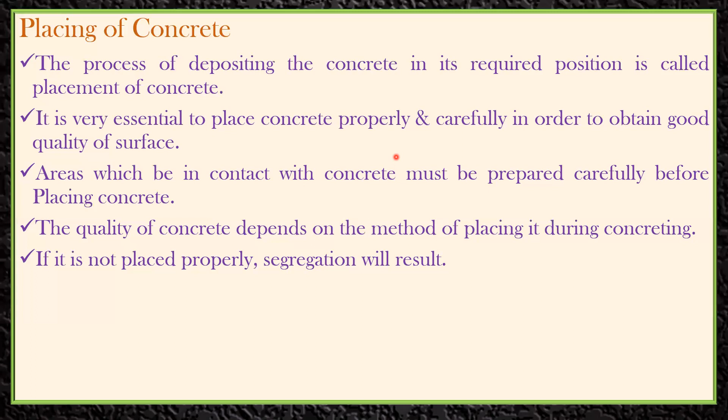So coming to the precautions: what precautions do you need to take while pouring, or placing, the concrete? The concrete should not be thrown from a height of more than 1 to 1.5 meters to prevent segregation, which we already saw. We should not do this. We already understood this, but since this is a part of concrete,

we need to understand it. So again, we know that segregation will happen if the height is more than 1.5 meters, so we should not do that. It's the same thing as I explained: you should not do the concreting from here. Instead, make a small opening here. From here you place the concrete, close that opening, and then again from here you can do the concreting.

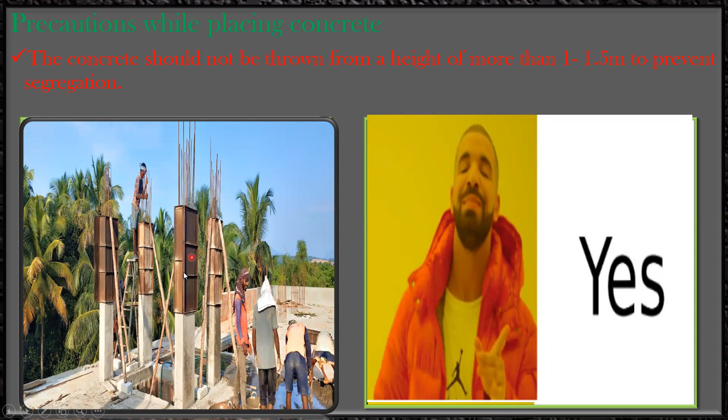That is in two lifts. This is the best way to do the concreting. The better way is to do the casting in two lifts. Today you do it here, and tomorrow you raise it and do it again. This is another way, you can see it here. See, up to here they have done it.

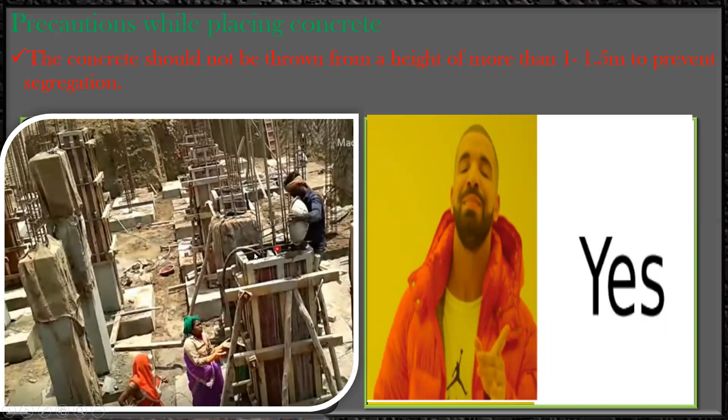Then again they have raised the formwork, I mean the shuttering, and again they have done the concreting. Look, here also they are doing the concreting. This guy is standing here and they are pouring the concrete, and they are also making use of a vibrator.

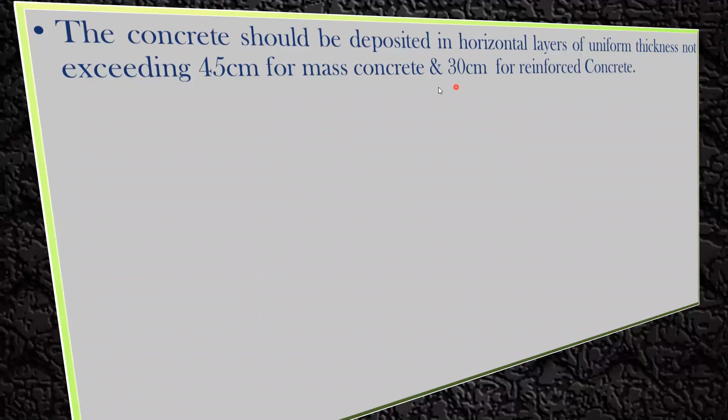Now coming to the other theory part: the concrete should be deposited in horizontal layers of uniform thickness, not exceeding 45 centimeters for mass concreting and 30 centimeters for reinforced concrete. So what do you mean by this? Whenever you place concrete, let us say mass concreting, like constructing an underground tank, a dam, or maybe a retaining wall. So these are the walls we have.

When we place the concrete, let us say the height is close to 600 mm. In that case, you have to pour the concrete up to a certain level, let us say up to this, something like 200 or 300 mm. Once you place the concrete, insert the poker needle, that is a vibrator, and do the vibration, so that if there are voids, everything will be cleared.

Then again you pour the concrete up to another 200 mm. This is called pouring in layers. Especially in retaining wall and underground tank construction, this is the procedure we follow. It's not that we bring the concrete and pour it at once; we cannot do that. Again 200, use the vibrator, then again 200. In this way we do the concreting.

Same here also. Let us say the height is close to 1.5 meters or 2 meters. Here also pour it in layers, let us say up to 300 mm. Pour the concrete, use the vibrator. Then another 300 mm, pour the concrete and use the vibrator. If you do it this way, there won't be segregation, and the placing of concrete will happen properly. This is called placing in layers, and this is what the first point means.

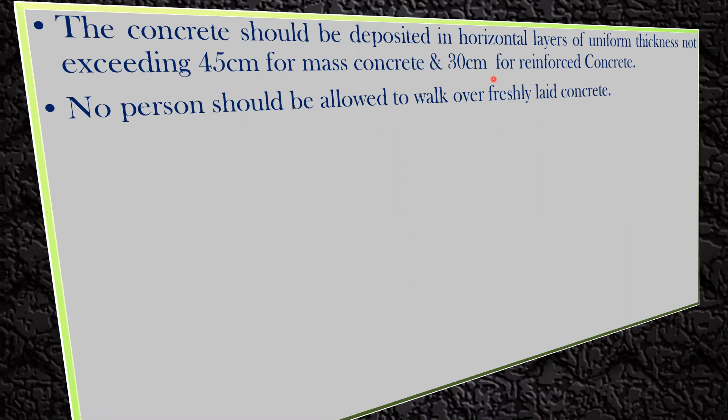Right, this is in horizontal layers of uniform thickness not exceeding 45, but usually 300 mm or 30 centimeters is what we can try to do. No person shall be allowed to walk on freshly laid concrete; that usually we don't allow.

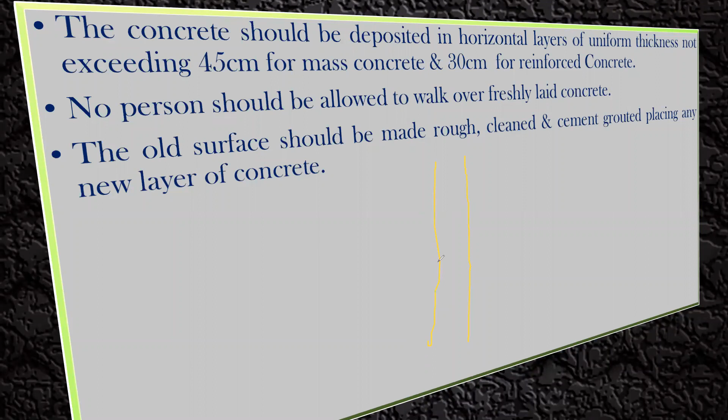The third is the old surface should be made rough, cleaned and cement grouted before placing any new layer of concrete. Actually what happens, whenever we pour the concrete in two layers, or let us say we want to do the casting of this column, and today you've done the concreting only up to here. The remaining portion you're going to do tomorrow. So tomorrow's concrete will be new, fresh concrete, and the concrete here will be already set because one day has passed. So this becomes my old surface.

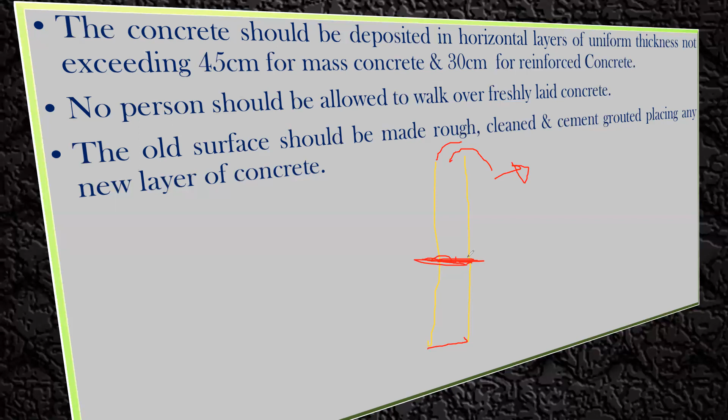So in order to have a good bond between the new concrete and the old concrete, you can try to make the top surface a bit rough, with the help of that small shovel what you get. Try to make a small impression here, a small hole, and make it rough, that's it. So that when the new concrete comes, since the surface is rough, it will have good friction. As a result, there will be good bonding between them. This is what we usually try to do.

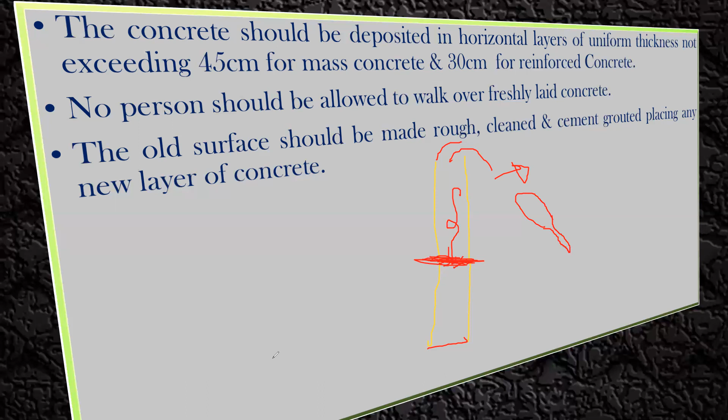The alignment of the reinforcement and formwork should not be disturbed in any case when the concrete is placed in the RCC members. This also we know. Especially this comes in terms of foundation. Let us say this is the foundation I have. When I do the foundation, we'll be having the column reinforcement along with it. We'll do the concreting up to this level, but the reinforcement of the column will be here.

So during the concreting, when you use the needle vibrator, there are chances that the column reinforcement may vibrate, I mean, it may tilt here and there. As a result, this reinforcement will get disturbed. So whenever we pour the concrete, we should make sure this is not happening. We try to tie the reinforcement from both sides with the help of a rod, which will not allow it to move here and there. So with the help of the two poles, we keep it in such a way that there is no movement of this reinforcement.

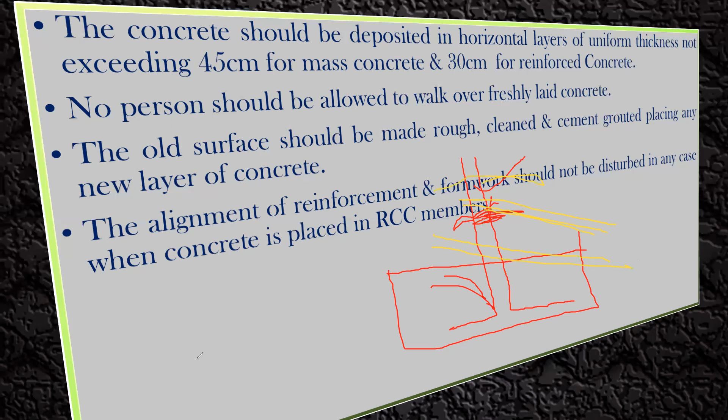Next is that the internal surface of the formwork should be oiled in order to prevent the concrete from sticking to the sides. Even while doing the cube testing, we were applying oil to the surface of the cube and also to the formwork. Next day when you do the deshuttering, meaning removing the formwork, because of the oil there won't be a good bond between the concrete and the plywood, I mean the formwork. As a result, you can take it out easily. So that is why the oil has to be applied.

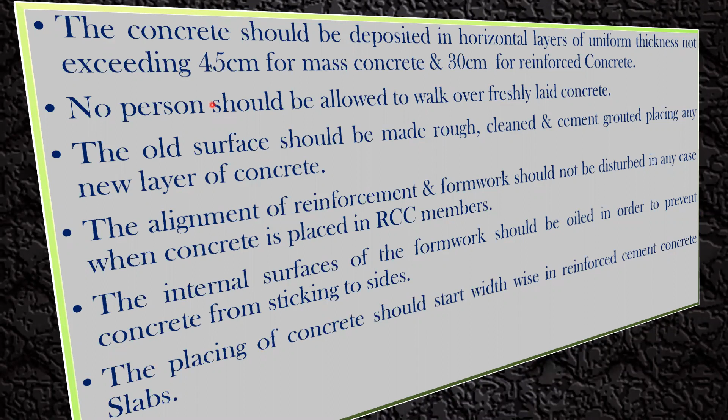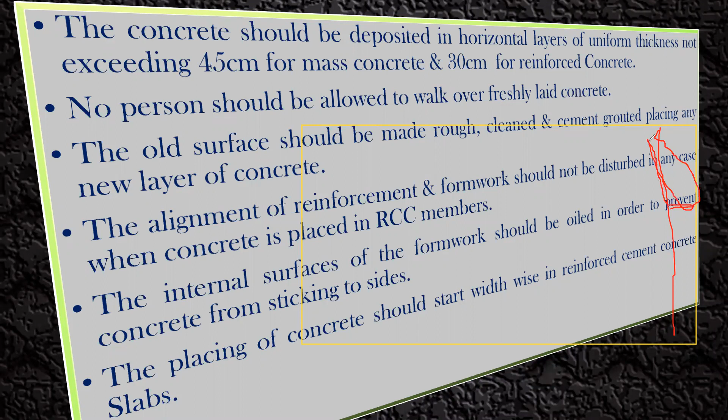The placing of concrete should start widthwise in reinforced cement concrete slabs. Let us say I'll draw a slab here. Whenever I place the concrete, we have to start along the width; this part is the width for me. So we'll start the concreting in this way. I'll pour the concrete here, here, here, here. This part I'll finish. Then again I'll pour it here. This part I'm going to finish.

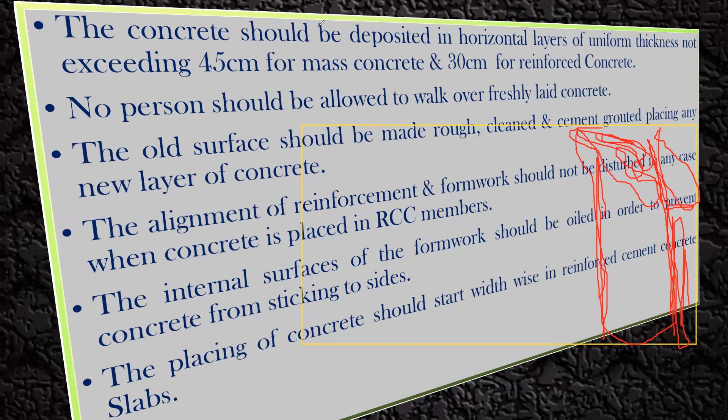Once these things are done, again I'll start to pour the concrete here, and finish this part. I'll pour the concrete, do the proper vibration, then from here I'll move here in this way. So in this way we are going along the width. That is what is written: the placing of concrete should start along the width. So this we have already seen.

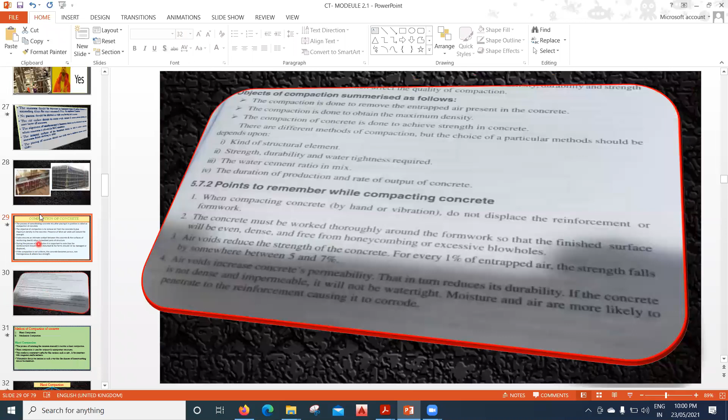Next, coming to the compaction, we'll see what compaction is in the next lecture.